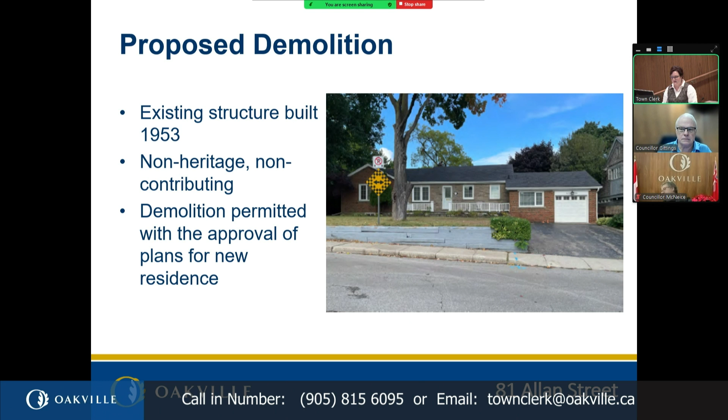However, approval of new plans for the residence is required, and before demolition can actually occur, they must have also applied for their building permit. That is to avoid empty gaps sitting in the streetscape if plans go awry.

So the big thing to take you through is the proposed new residence that would replace the 1953 structure. What we're looking at is a 2-story buff brick with vertical wood siding residence. You'll note there are several mature town trees at the property frontage.

Those trees are on town property, even though they're within the retaining wall at the side, just above the sidewalk. They will be subject to the town's tree conservation standards so they are safeguarded during construction, and the owner is very much in support of maintaining these trees.

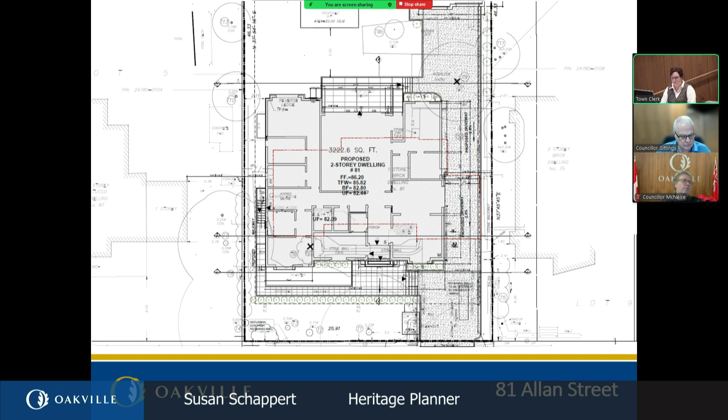So I'm going to take you through the drawings as proposed. On this drawing, it's a little hard to see, but there is a red line that shows the footprint of the existing house. But really what we're concerned about is looking at the footprint of the new proposed residence on the lot there.

So this is the front elevation. This is what will face onto Allan Street. You can see here that the overall design for the residence is, I would say, contemporary in nature, but with more traditional details. That doesn't mean they've gone overboard with any type of fake heritage. They are trying to provide a blending of contemporary and traditional to let it be known that this is a new house within the streetscape, but also one that attempts to be compatible and sympathetic to its neighbors. So the principal cladding material you see from the front elevation is a buff clad brick with, of course, the vertical wood siding toward the north corner of the property.

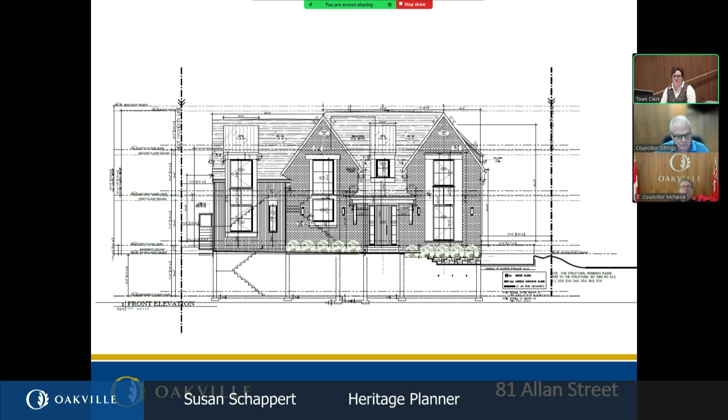And I would note that while this home presents as a single-family residence, it is actually being constructed so that it will have two separate units inside. The units are divided horizontally so that the first floor and basement are one unit, and the second floor is a second unit. The design itself is quite intentional to look as a single-family home, in case in the future anybody would prefer that it be a single-family home. It could be converted without significant changes to the exterior of the property.

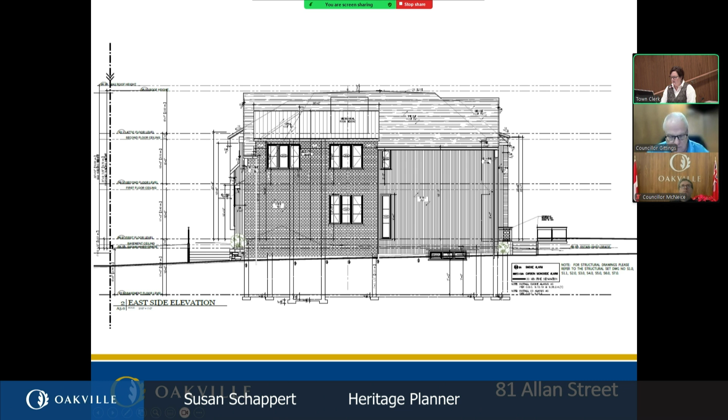So just coming around the side of the property, you can see here there are some differing roof lines that are meeting up so that you can actually see these are the side pitches of the gable fronts, the gables that front onto Allan Street. And again, the mix of buff brick and vertical cladding.

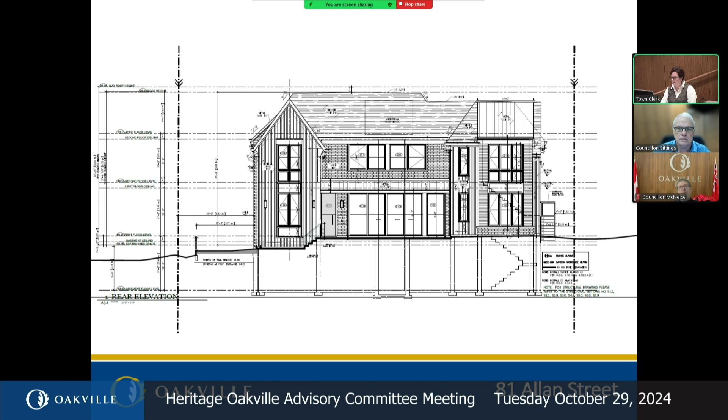Coming around to the rear of the property, you see somewhat similar details with the front-facing wall gables that project slightly from the flat plane of the elevation. And of course, as is common, there is slightly more glazing on the back of the property in order for the occupants to take advantage of their outdoor amenity spaces.

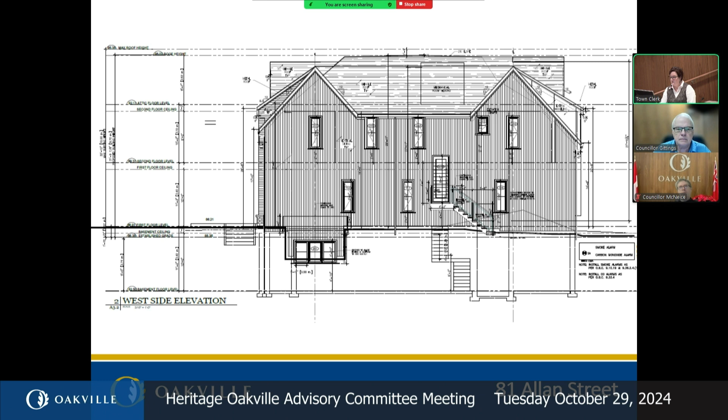This is coming around to the other side of the property, where we can see how those roof lines meet up. The entrance that you see here is a separate entrance to that second story unit. As the house is designed to look as though it is a single-family residence, this entranceway is designed intentionally to have that kind of side door aspect to it, but it is the entrance into a stairway that will take you up to the second unit on the second story of the house.

The applicants have been working with town staff over the past few months. We had a pre-consultation with several committee members about a month or so ago, in addition to several discussions directly with heritage planning staff. I would note that there have been a number of changes made to the design presented here from what was originally being considered for the site, as the applicants took into consideration some of the feedback offered at those pre-consultation sessions.

What you see here, I think, is one of the most important images, because it shows how the proposed new residence fits into the streetscape of this side of Allan Street in the 1st and 2nd Street Heritage Conservation District. You can see just to the north there is a property that recently came in for some fairly significant renovations to the existing heritage house, which I think were done quite well with the construction of that addition to the north with the garage. It is a fairly substantially massed house, which I think provides a little bit of balance to the house that's being proposed that we're looking at today at 81 Allan Street.

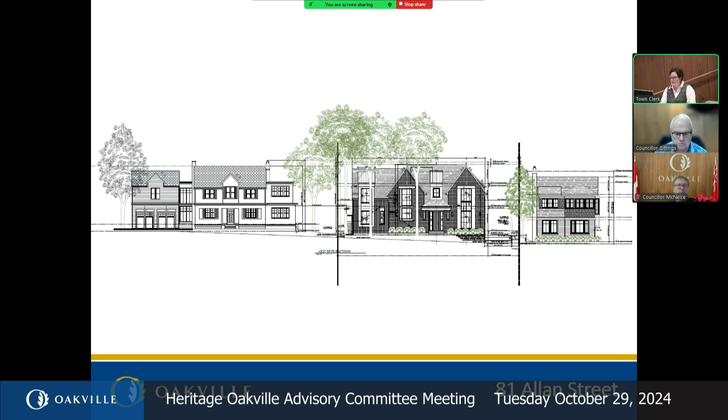So the massing is not particularly out of character for the area. The height is similar to neighboring properties, and as I noted, it is lower than what the zoning bylaw permits. And generally speaking, it does present as a single-family residence in this line of single-family homes.

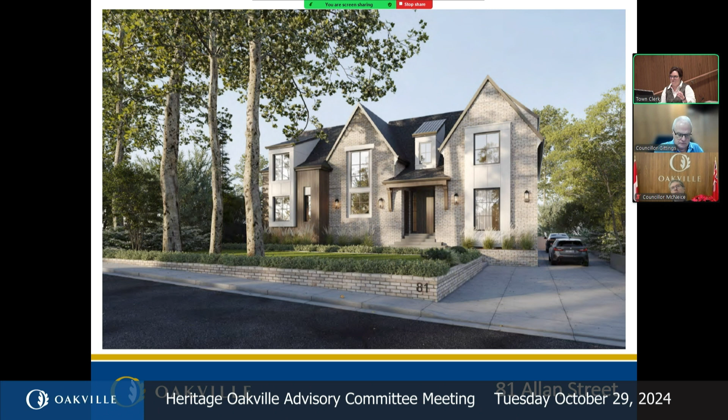There are some visual keys: the slight protrusion of the vertical siding coming forward, the slight recession of the entrance, to help break up what is essentially a substantially large structure, and to provide more visual elements to stimulate the eye, so that you can see this building in more pedestrian scaled terms rather than as a large block.

So we have, of course, included the assessment for the proposed residence. Appendix C holds the guidelines for new development from the 1st and 2nd Street Heritage Conservation District Plan. Heritage planning staff generally feel that the scale and massing is appropriate for the streetscape, but we do note it is going to be a significant change from what is existing.

The height is within the permitted zoning and slightly lower. The style of the residence is contemporary with these traditional elements, which is something I think is generally encouraged in the 1st and 2nd Street District Plan, to make sure development is clearly of its time while still attempting to be compatible or sympathetic with traditional styles that may exist around it.

The buff brick and the natural colors of the wood siding generally are intended to blend this house into its natural surroundings. The materials we find are generally appropriate as well, in accordance with the guidelines. And the main entrance does face the street as is required.

And as I noted, even though there is a second entrance for the second unit, it is located as a side entrance to ensure that this main entrance keeps our focal point facing on Allan Street.

The applicants have also committed to the conservation of those mature town trees located at the very front of the property, although there will be some smaller trees that will have to be removed that are very close to the existing foundations of the existing residence.

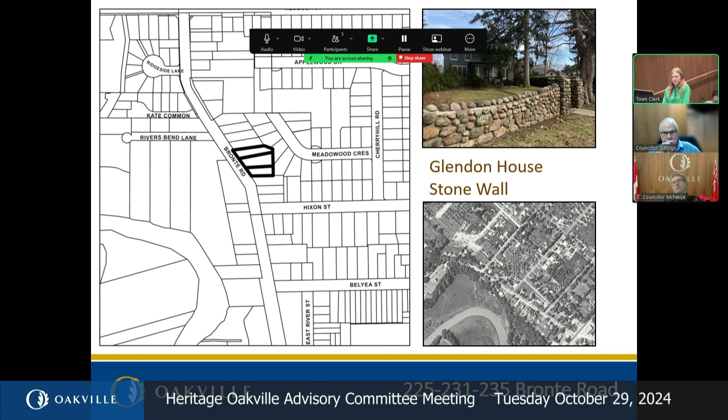Thank you, Mr. Chair. Yes, we have 5 designations as part of the Heritage Designation Project. I'll go through them briefly. The first 3 are separate properties, but essentially the same structure, and that is the stone wall from the Glendon House on the east side of Bronte Road, north of the older village of Bronte. The property has been evaluated and found to have cultural heritage value as a rare remaining example of an early 20th century fieldstone wall in Oakville.

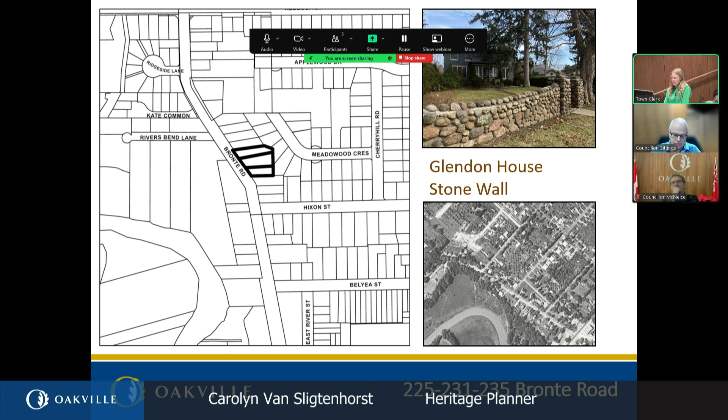I'll just go back to this previous image. The top right corner shows the wall just in front of the middle property at 231 Bronte Road. As any of you familiar with that street can see, the wall extends onto 3 properties, but was originally part of the Glendon House property, which was larger. The property is historically associated with Bronte's late 19th and early 20th century residential and summer home development history, including the Glendon House. As a side note, we are also evaluating the Glendon House, but currently we're just bringing forward the wall.

So finally, we found it to have contextual value. It's physically, functionally, visually, and historically linked to its surroundings. Again, an early 20th century residential neighborhood, which has for many years been characterized by these smaller to mid-sized homes, built for Bronte's village's middle class, but also as part of the growing cottage industry that was there during those years. So that's our first one.

Our second one is the Dame McKendrick House at 1314 Lakeshore Road East. If any of you are familiar with this one, it's a site you've probably mostly seen just by driving along Lakeshore Road, but also going into Gairloch Gardens. This is associated with the McKendrick family of Gairloch Gardens and is still quite visible along that entrance as you enter. It has cultural heritage value as a representative example of a Tudor revival style built during the arts and crafts era, as the original house known as Chestnut Point was on Gairloch Gardens.

Historically associated with the McKendrick family, in this case specifically Dane McKendrick, who had built the house. Hugh McKendrick had given these lots to his children to build homes, and this one was built for Dane. It's also associated with William Gould Armstrong, a well-known architect who owned the property and made changes to it as well. And finally, contextually, it's important in supporting and maintaining the character of Gairloch Gardens, which is a designated cultural heritage landscape, and is physically, functionally, visually, and historically linked to its surroundings.

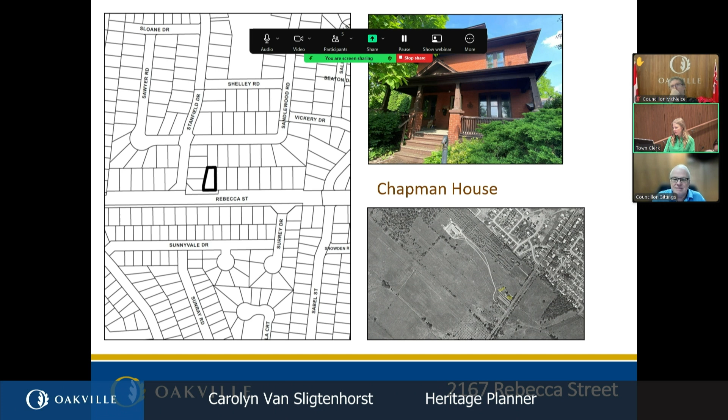And finally, the third one we have here, the Chapman House at 2167 Rebecca Street. You can see that the top right image is a view of the house, and the bottom right image is an older aerial photograph showing when it was part of a rural area, which was really populated mostly by farms and orchards. As you can see in that image, you can see a lot of little dots on that aerial view showing all the fruit orchards that were quite common in this neighborhood.

So this one is a representative example of an Edwardian classicism brick farmhouse. It's historically associated with the theme of agriculture and fruit farming in Oakville, of which it was a part. And finally, contextually, it's physically, visually, and historically linked to its surroundings and contributes to the understanding of the local communities of Bronte and Oakville and the long history of fruit farming in this area.

So the staff recommendation is that a notice of intention to designate be issued for these 5 properties. Again, that first one is one element, but because the stone wall is on 3 properties, we are putting through 3 separate notices for the 3 separate properties. And I'm happy to answer any questions.